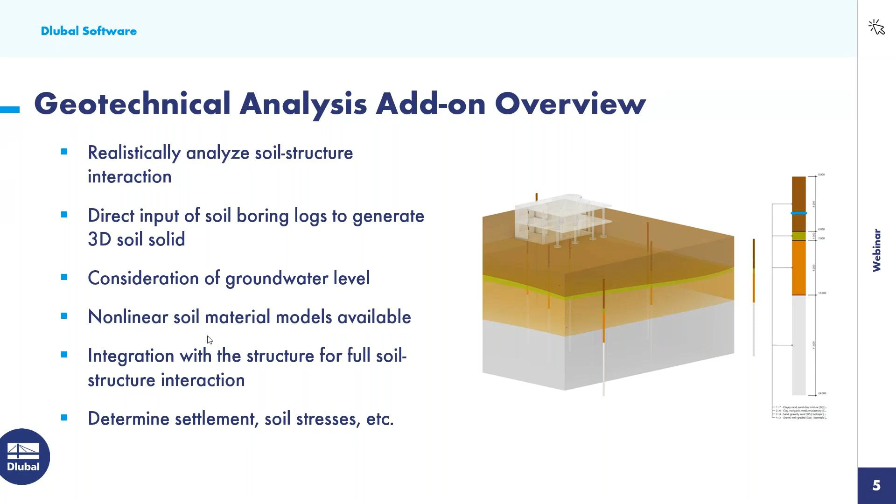So we might wonder why we'd want to use this geotechnical analysis add-on as opposed to a more simplified approach, where we have a slab type element and typically just apply a spring support stiffness to the base of the element. In comparison, the geotechnical analysis will generate this 3D soil solid instead, as we see here on the right-hand side.

The first benefit is realistic soil structure interaction. We want to capture the load distribution, lateral pressures, and shear interaction in all directions, beyond what the simplified vertical support can provide. We also account for nonlinear and layered soil behavior, including the soil's stress-dependent stiffness, plastic deformation, and layered soil profiles for better accuracy. We can also accurately predict settlement and deformation. With the soil solid, we can capture differential settlement, lateral spreading, and localized failure much more effectively than the simplified approach.

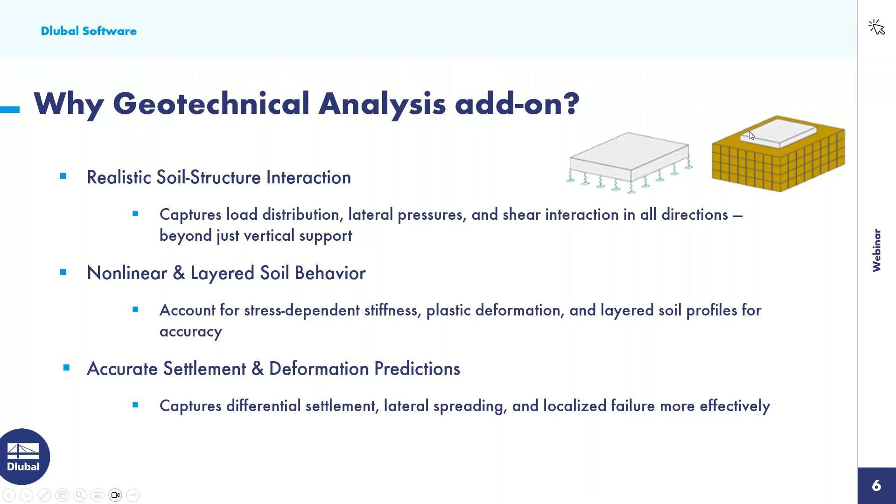So on this next slide, we do have a few modeling tips when we're talking about this 3D soil solid. The solid dimensions should be adequately defined when we compare this to the structure's dimensions. This is an image taken directly from our online help manual here in the upper right-hand corner, where our structure is going to have the dimensions A and B.

So these are the starting recommendations here for the size of our soil solid, but we highly encourage you to carry out what we call an edge distance results study. Ultimately, this may be the starting point, but perhaps we can decrease the size of this soil solid. That's going to generate a much quicker analysis, the smaller this solid is within an FEA program, but we want to see less than 10% changes in the stresses at the boundary surface. If we continue shrinking the size of this solid model and we're seeing higher changes in stress at these boundary surfaces, then we know our soil solid is not big enough. So we probably want to increase that size, again, to get accurate results here in comparison to the loads that we will apply to the structure as well as the size of the structure.

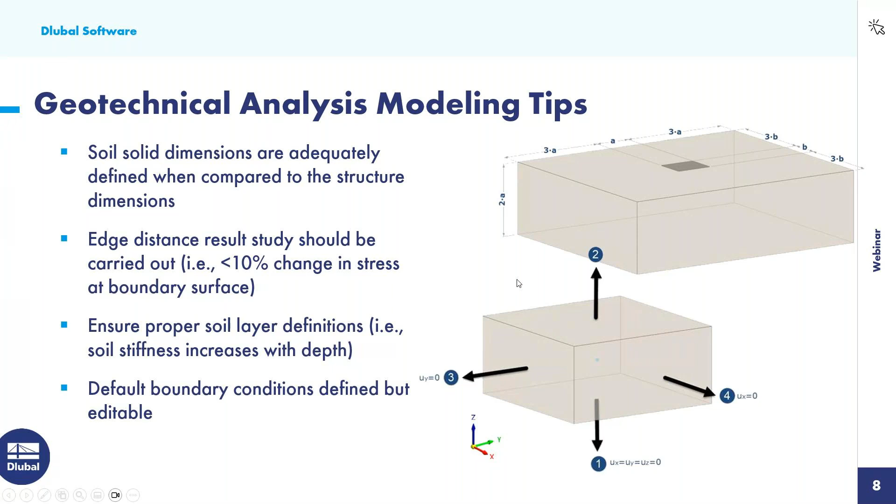For the last point here, the program will automatically create the default boundary conditions of our solid element, but these are always editable. As you can see here, another image from our online help manual, with the soil solid, in the lateral directions, we are going to restrain the translation. At the bottom of the solid, we're going to set a support so that translation in all three directions is fixed. And then of course, at the top here, number 2, the solid will be free to move.

Now looking at the nonlinear solid soil material models available within this add-on. Soil is a highly nonlinear 3-part system, and this includes soil particles, water, and air. So therefore, we need to utilize special material models that mathematically represent this very complex soil behavior in something like an FEA program. Currently, when looking at RFEM, we have 4 material models available, including the modified Mohr-Coulomb, the nonlinear elastic, and the modified hardening soil, as well as the Hoek-Brown.

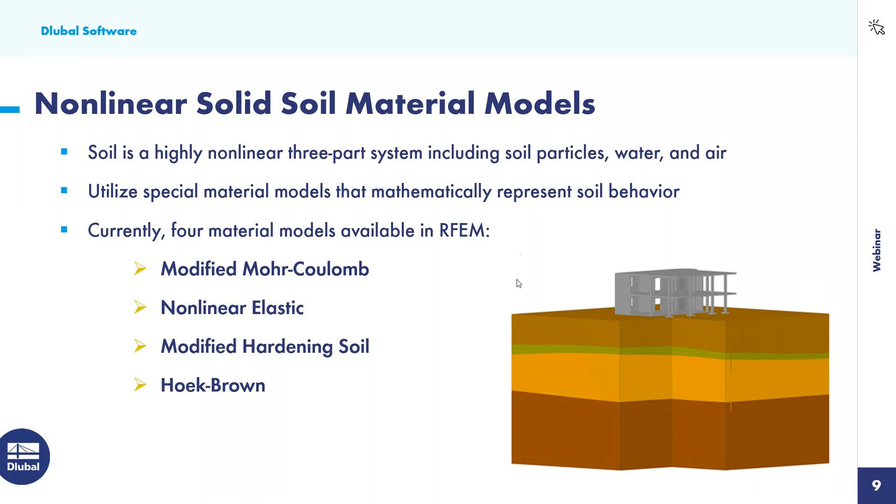So now we will investigate each one of these material models. I think it's important to have a fundamental understanding of what each one of them can provide and maybe the best scenario to use this in your model.

We'll begin here with the modified Mohr-Coulomb. This is going to combine linear elastic and ideal plastic behavior. So essentially, we have a reversible linear elastic behavior within a stress limit zone, but when that stress reaches the yield point, then that's when the irreversible plastic behavior is going to begin, and this is all according to the Mohr-Coulomb equations. The material will also fail when the shear stress exceeds the material's shear resistance. These 3 points can be summed up here with the stress strain diagram for this material model type. So this modified Mohr-Coulomb is really ideal for approximating the actual soil behavior, but with very few material property definitions.

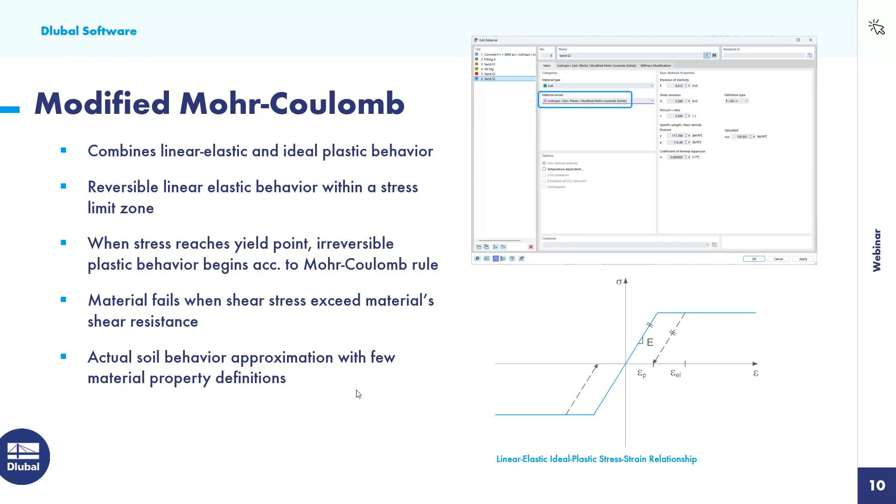So the input here, once we get into RFEM, is quite a bit simpler than when we compare to the other material models. Our second material type is nonlinear elastic, and this is actually what we'll use in our first example today. So this is a hyperbolic nonlinear elastic behavior for this type of soil.

The third material type is a modified hardening soil. This is an advanced elastoplastic soil model for nonlinear soil behavior. For this one, we have elastic behavior where soil stiffness varies with the stress level for both the oedometer and the triaxial stress strain responses, and again we have two separate stress strain diagrams depending on the different conditions applied.

When the stress reaches the yield point, the elastoplastic with double hardening behavior will begin. The soil material is also stress dependent with stiffness, in the sense that with higher stresses we're going to have increased stiffness. So when we look at much deeper soil levels, they're able to resist deformations much better than soils near the top surface. This can provide more realistic predictions compared to the simpler Mohr-Coulomb model, and is ideal for soft or over-consolidated soils.

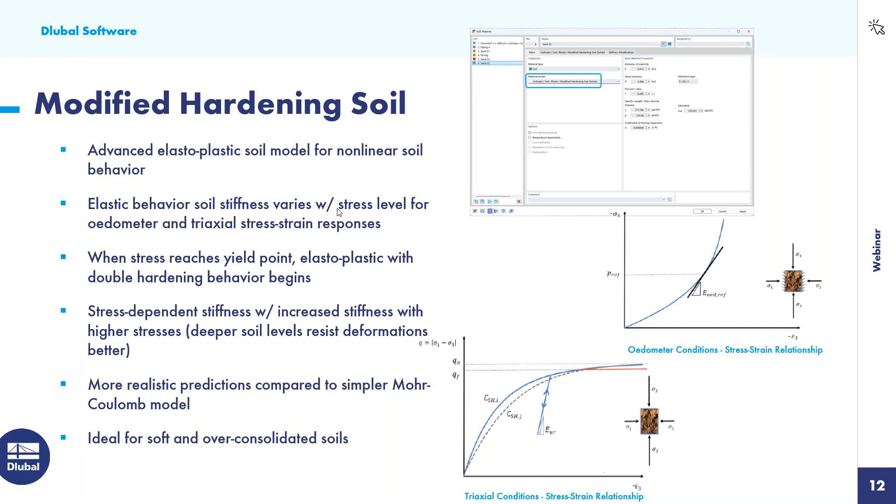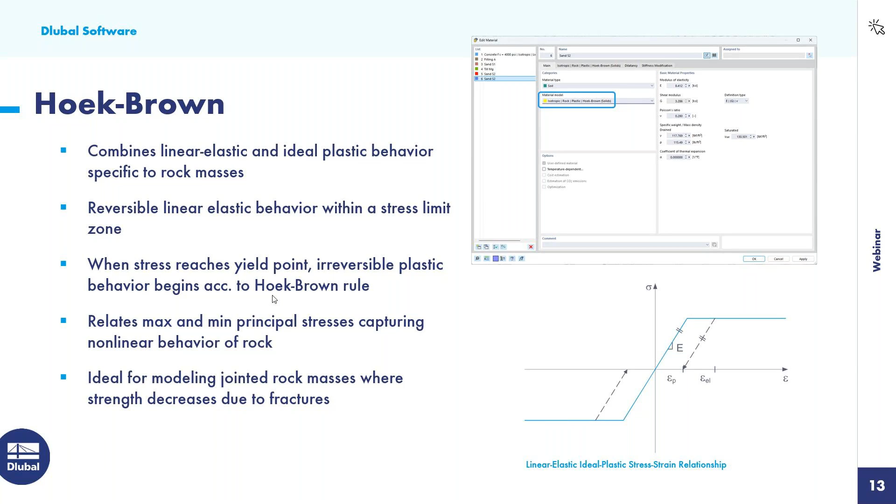Okay, so we are finally ready to get into our first example today. When we create a new model in RFEM, we are presented with our base data dialog box. For those of you not familiar with our program, RFEM 6, RFEM is the base program. This allows us to fully model a structure. We have access to all the materials, the cross sections from all the various standards, and we can load it and get a full static analysis.

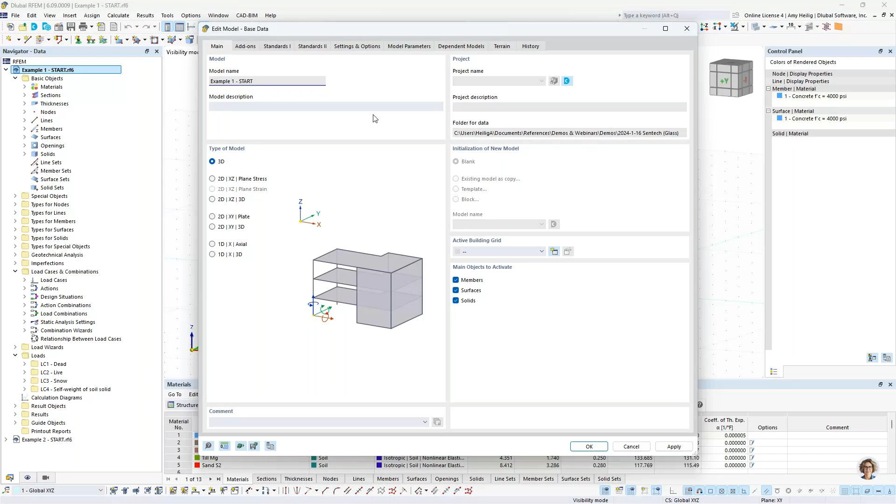Under this second tab are all of the additional add-ons that we have available. Today we'll be focusing on our geotechnical analysis add-on that's activated here, but it's entirely possible if we wanted to also design this structure utilizing the design add-ons such as concrete design, we could carry out the membrane surface reinforced concrete design according to the ACI or CSA standard.

So once we have defined this information, we are presented with the main program. I have already modeled this concrete structure, as you can see here, with surfaces and member elements, and the material is 4,000 PSI concrete. I also have applied a few loads directly to the structure.

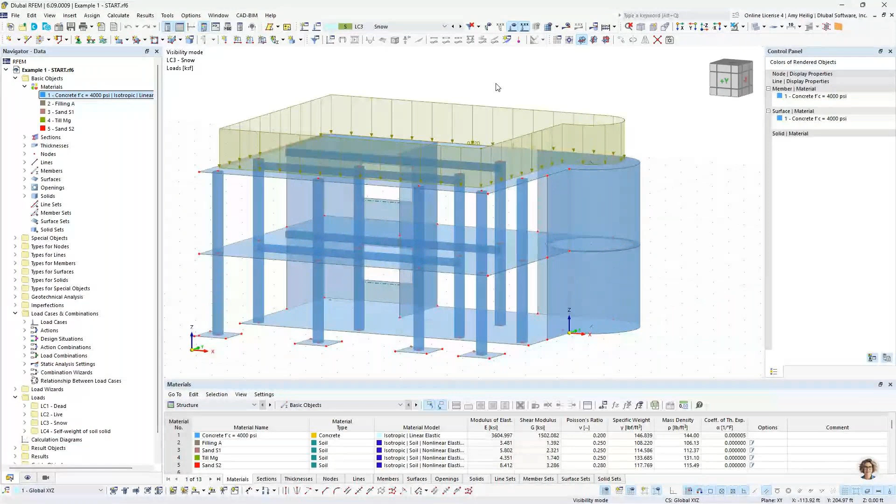Using our dropdown at the top to select the dead load case, we'll go ahead and turn on the display of the loads. We have here just a general surface load at all three levels. When we look at the live load, same concept with a slightly different magnitude, and then we have a snow load. So all vertical gravity loads for today's soil structure interaction.

Now in addition to the material defined for this structure, I went ahead and also defined the materials here for our soil. So let us take a look at that in more detail within the material dialog box.

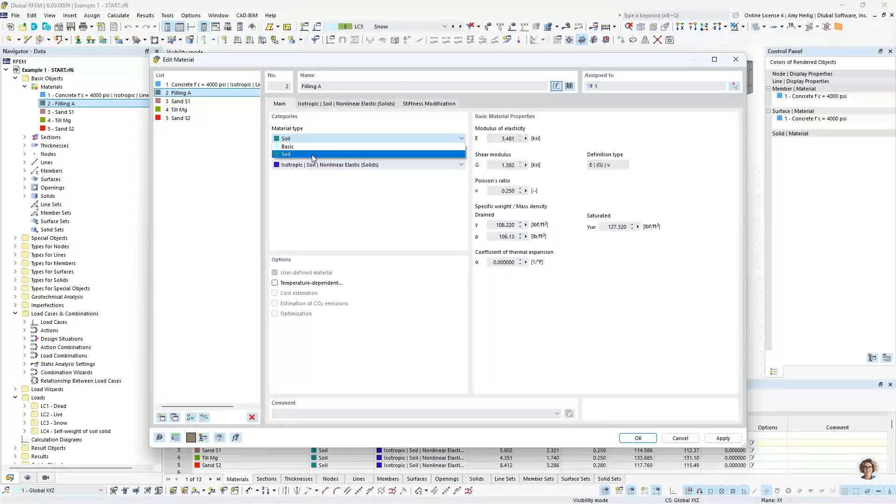Now the first thing to know is that when you create a new material, we want to set the material type to soil, and this is only available because I have activated that geotechnical analysis add-on. If we prefer, we could visit our library and use our filters on the left to select the soil option. We have a few soil input options that exist here that we could use as a template, and we'll continue adding more materials in the future as well. We could bring those into this dialog box and use it as a template option, or alternatively define all this information from scratch.

But once we've defined the material type to soil, you'll notice the material model, and here are those four different material models available that we went through within the PowerPoint slides. For today's example, I'm going to utilize the nonlinear elastic material, and I went ahead and put in the specific weight. Notice that you can specify here the drained specific weight versus saturated, because we can input into the program where the groundwater table is located.

Under the second tab is where we have additional information specific to our material. Perhaps we got this from the geotech engineer or from soil testing directly, but this is information we need to input into the program. So I have four different soil materials here, including a filling, a sand, a till, as well as another sand material. Again all nonlinear elastic, but the material properties are going to vary slightly.

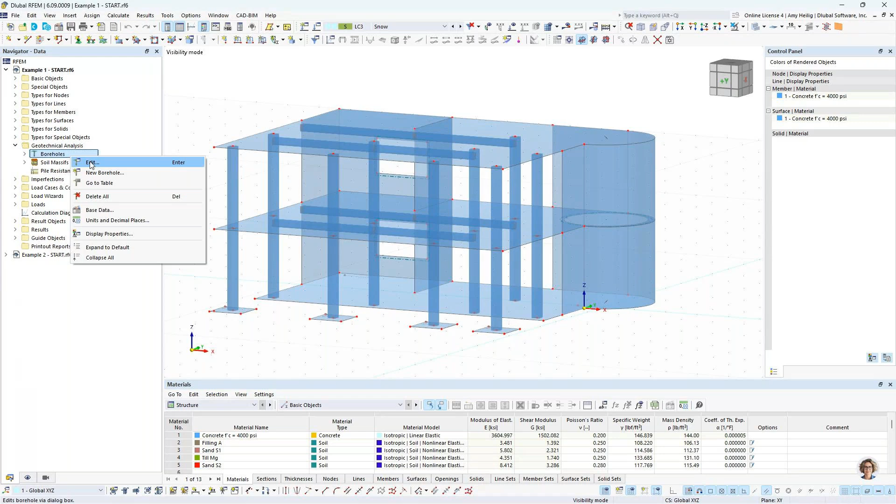So once we have input in all of our materials, we're ready to create our first borehole. I'll go ahead and collapse these folders over on the left here within our navigator. You'll notice that we have the geotechnical analysis folder, available because we've activated that add-on. We can right click here to create our first borehole definition.

Within this dialog box, we want to first specify where this borehole exists. We can either graphically select it with this pointer option, or we can input the XYZ coordinates as we see back here in the model directly by typing them in. So that's what I'll do today by typing in negative 91.67 in the X location, 70.67 in the Y, and in the Z direction this is going to be negative 0.5.

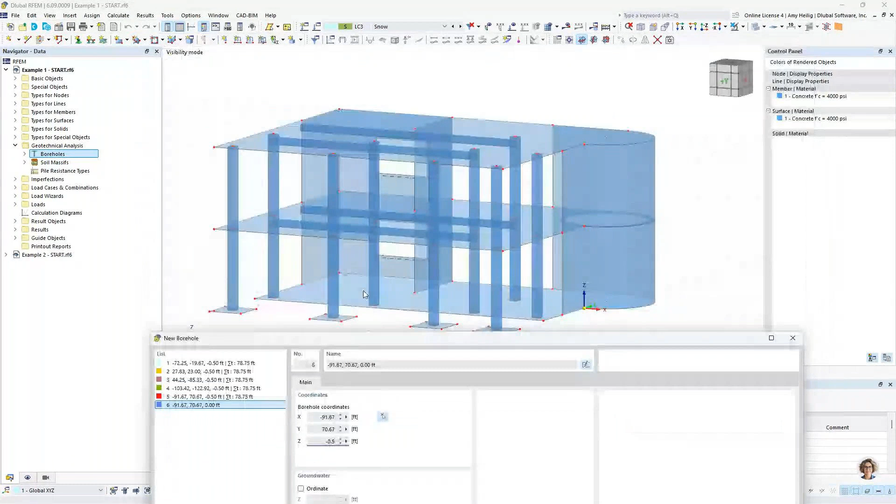Notice I am not placing this at the 0 elevation, which is where the foundation of my structure is located. I'm placing this 6 inches below the structure, and there's a reason for this that will come into play a little bit later on with what we call surface contacts, but just keep that in mind.

Now we also can specify the groundwater location with the elevation input here of negative 11.5 feet in the Z direction, or the vertical direction. And finally, we can populate down here our soil layers by using our drop down to simply select the materials that we have already defined within the model.

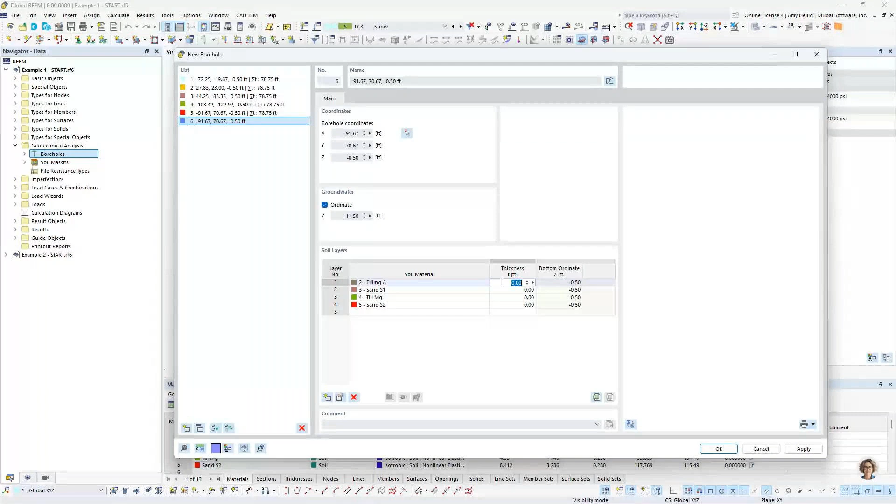So I'm selecting all 4 materials that I have input in. The second column is where I will input the depth that each material occurs within my soil testing. So the first depth is going to be 19.67 feet. I use my down arrow key. The next layer depth is going to be 3.25. Then we have 19.67, and the final depth is going to be 36.16.

So we get a nice overview here of the elevation of each of the different soil materials. We can even see where the groundwater level is located as well. Once we have input these different boring logs, and you'll notice I have already defined several other boreholes, I'll go ahead and turn these on graphically within the model. Under the second tab, under the geotechnical analysis, I currently have these turned off, so I'll go ahead and activate them. We have a total of 6 boreholes defined here in and around the structure.

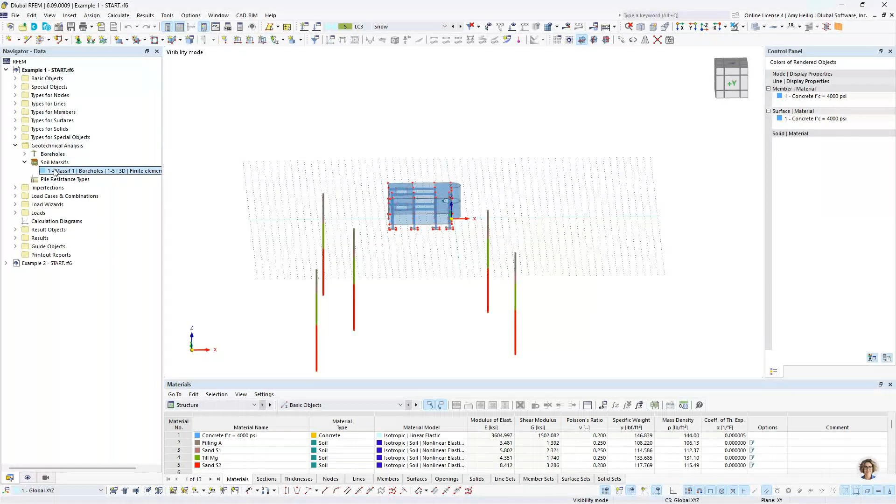So once these are now defined, we are ready to create what we call the soil massif. This will generate that 3D soil solid. We can take a look here—I went ahead and already created this 3D soil solid, but let us go through it. So we can create a new definition type here in the lower left.

And the first input is a soil massif type. We're going to set this to boreholes. I'll explain a little bit later on what the soil solids advantage is here, but for now with the boreholes, we can select this option and either graphically select boreholes number 1 through 5, or just type it in directly on our keyboard here.

The soil massif center should be placed as close to the center of the structure as possible. We can graphically select this here within the model, or we could directly type in the X and Y coordinate points. Then the soil massif dimensions.

We discussed this in the PowerPoint—these dimensions are really important. We want to make sure it's adequately large enough that we're not seeing the stresses affected at the boundary edges, but we don't want to set it too large so that it affects our calculation time with no added benefit.

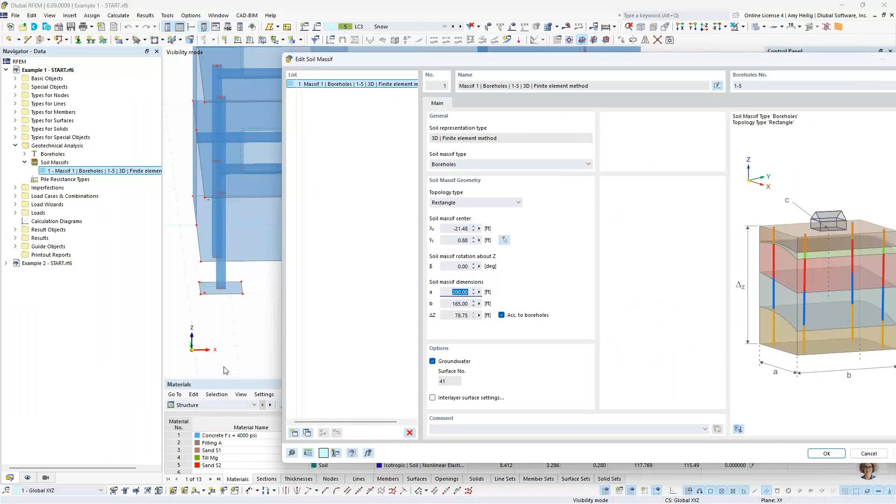So we have here the soil dimension in the A direction. We have a nice picture showing the A dimension, which aligns with the global x-axis—we can see the x-axis here back in our model. I have set this to 200 feet. My B dimension is going to be set at 165 feet, which aligns with the global y-axis.

We also can account for the groundwater within the soil solid by turning on this checkbox here. When that is finished, I will go ahead and display the 3D solid, since I currently have it hidden. If I turn this into a solid rendered view, we get a nice look at all of the different materials that were generated with the soil solid from the input of the boreholes. Now notice that some of these boreholes exist outside of the solid—no problem.

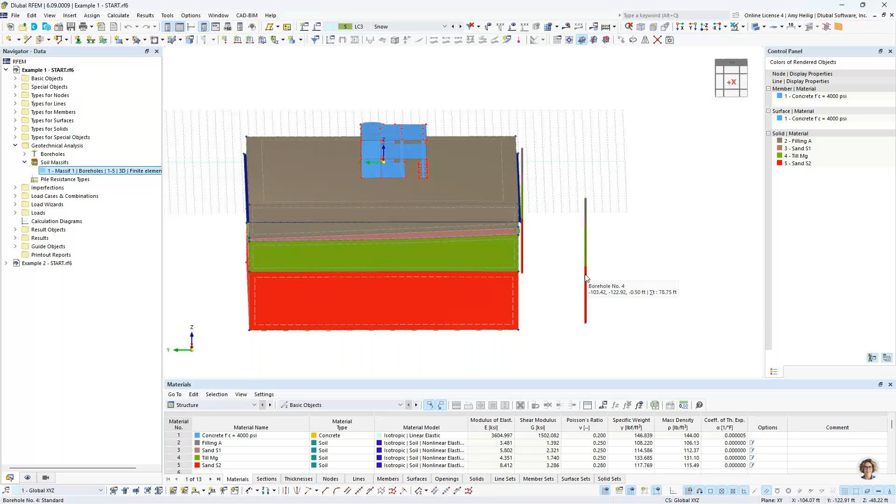We're still considering the geometry here of these different solids, but we don't necessarily need to extend it out to these different locations.

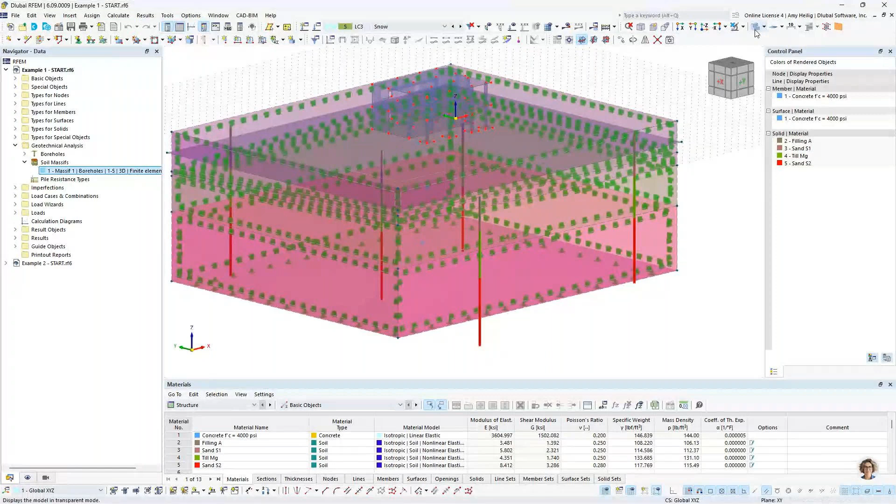Turning this back into a rendered view with transparency, you can see all of these green symbols. These are our support conditions, and I also mentioned in the PowerPoint that these support conditions are automatically generated for us. But we might be wondering, how can I make modifications to this soil solid? Because right now everything is dependent on these boreholes.

Well, if we look at the basic objects here, we have the solids option, and the program has automatically generated 4 different solids for each material type. So you can see here solid 2, solid 3, and solid 4. Again, the geometry is dependent on the boreholes.

What we have the ability to do is go back to the soil massif here and say, okay, now that our solid elements are generated, I no longer want this to be dependent on the boreholes. Rather, I can toggle this to the soil solids. And now I have the ability, because it's referencing solids 1 through 4 here, to go back into the model to make the modifications manually.

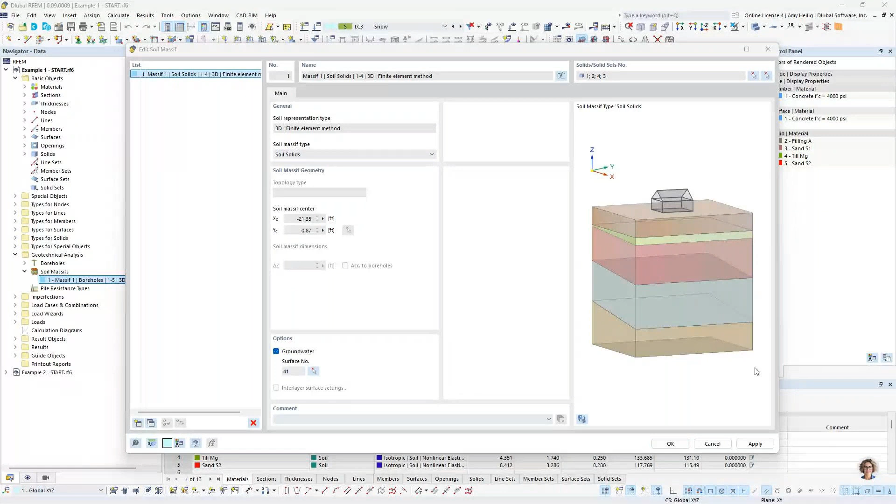We won't go ahead and do this. We'll leave this as dependent on the boreholes for now, but I think that's an important point to cover if we do want to make those manual changes.

Now we need to discuss the behavior of the foundation elements, such as these slab elements, to the 3D soil solid. We do so with a nonlinear option in the program. I'll go ahead and expand this here. Under these special objects, we have what we call a surface contact.

So we'll right click to create a new surface contact. This feature within the program allows us to define this geometric nonlinear behavior between 2 surfaces or groups of surfaces. So the first surface that we want to select here is going to be the top surface of my 3D solid that represents my soil.

So surface number 1. The second surface, I want to define the behavior here with this slab on grade as a portion of my structure. The third input option here is a surface contact type.

With this option, we have the ability to define the behavior of the contact perpendicular to the surfaces. We've set this in the dropdown to fail under tension. So if we have tension between these 2 surfaces, we're not going to see any force transmission, but in compression, we'll see the 2 bearing on one another.

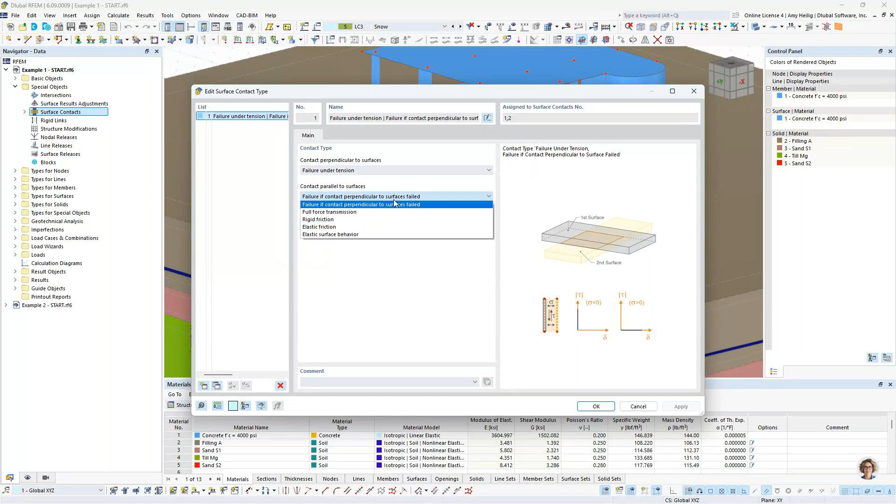Now, contact parallel to surfaces, so we're talking about the shear behavior. We have set this to fail if the contact perpendicular to the surfaces fails. There are some different options you can select from here, but for today, this is adequate. So once we have input in this option, we click OK. That surface contact is defined.

I also defined here a second surface contact. This is going to be for the grouped surfaces here for my isolated footings at the base of my column. You can see surfaces 18 through 21. And my surface number 1 here is again going to be that top surface of the soil solid with that same nonlinear behavior defined.

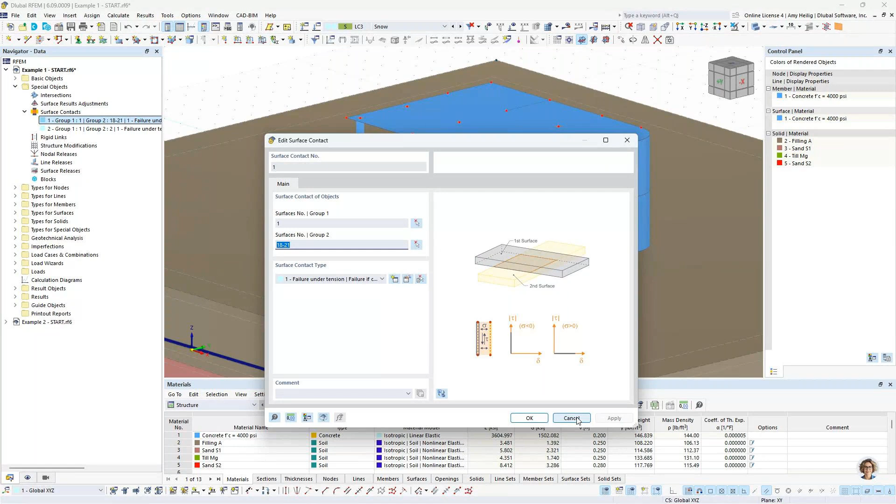So the reason why I set the soil solid 6 inches below the foundation elements is because surface contacts cannot be in the same elevation. The program will give you an error. So I set the soil solid 6 inches below the foundation in the vertical direction because my foundation elements are 12 inches thick. So I considered half the thickness of these elements to again set that soil solid 6 inches below this elevation.

The final thing to check here is the FE mesh settings before we move on to the loading. So under calculate mesh settings, and we talked a little bit about this in the PowerPoint, the target length for the finite element. This 1.5 feet is going to refer to the structure element itself.

Maybe we want to increase this to something like 2 feet, just for a slightly quicker calculation. It's worth noting too that you can always apply mesh refinements at specific surfaces or locations if you'd like. But notice that we have a 4th tab here for solids. This solid element for soil has a completely different input for the FE mesh that typically is going to be much larger. Again, we want to take into consideration maybe something like an FE mesh study, so that we set the FE mesh large enough that we're not really slowing down the calculation.

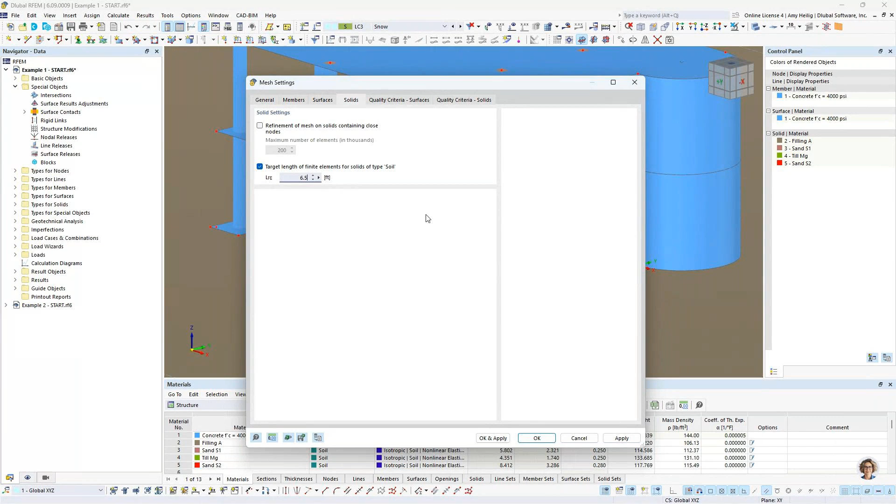But if we set it to something too large, we're going to get inaccurate results. So we want to find this happy medium. Maybe for this example, I'm going to reduce the soil solid FE mesh to something like 6.5 feet.

Now moving on to the loading, we'll open our load cases and combinations dialog box. We already saw that we have applied the dead load, live load, and snow load to the structure. Now you'll notice the program has automatically created this 4th load case for the self-weight of the soil solid. This was automatically generated with the geotech analysis add-on activated.

If we go back to this dead load up here, we are also considering self-weight, but this is for the structure, not the soil. So it's really important now that we address these static analysis settings when we are integrating this soil structure interaction. Let's take a look at these settings here.

By default, the program has the load cases set to a geometrically linear analysis. Perhaps we want to increase the load increments to 4 for a slightly more accurate calculation with these nonlinear materials. This is perfectly fine for load cases 1 through 3, but we actually need to make a copy of this static analysis setting.

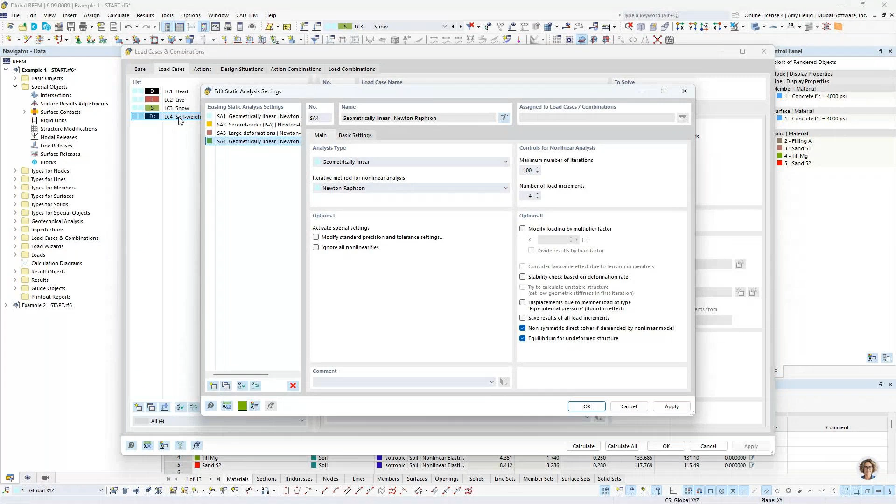We'll leave it at geometrically linear, the load increments to 4, but now we need to turn on this equilibrium for undeformed structure. This analysis setting is going to be specific for the self-weight of the soil, load case number 4 here. So what exactly is this checkbox doing?

Let us go back to the PowerPoint where I can explain this further. So this all refers to the initial state considerations of our soil.

We want to account for the soil self-weight before the construction begins. We're talking about before we add in the structure self-weight, before we add in the dead, live, and snow to the structure itself. So we want to calculate the soil self-weight in this initial load case.

But here is the complex topic related to this: that this starting point, referring here to the stress strain diagram, this starting point is going to be this blue dot here. This is where we are now going to apply the additional loads to the structure, such as the dead, live, and snow.

Well, we want to account for the soil's initial stress state and stiffness. So that's what we're doing here within this blue area, again, before we apply those additional loads.

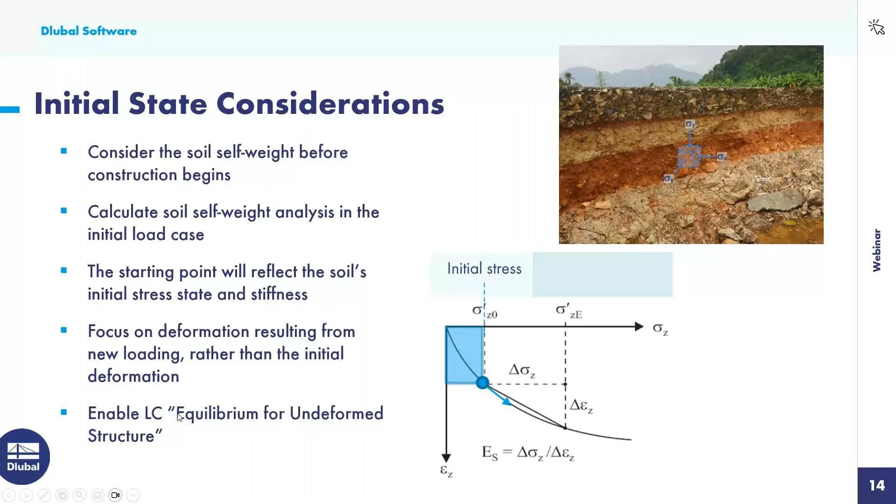But we want to focus on the deformation resulting from the new loading—again, the structure's dead, live, and snow loads—rather than the initial deformation from the soil self-weight. We want that deformation to start at 0, while still considering the initial state of the soil for stress and stiffness. That's why we enable this load cases equilibrium for undeformed structure within that analysis type.

So we'll go back to the program to ensure that this option is turned on here. We click OK, and then in our dropdown, we need to make sure that load case number 4 has this new static analysis setting activated.

Now, it really doesn't make a whole lot of sense to solve these other load cases without considering the self-weight of the soil, so we can just go ahead and turn those off. But rather, we want to combine all these loads within the load combinations themselves.

So we jump here to what we call the Design Situations tab. Design situations are automatically created by the program according to the ASCE 7 or the NBC standard. All this is doing is creating this first design situation for our factored load combination, grouping those load combinations together.

The second design situation created here is our ASD load combination, again just grouping together those unfactored load combinations from the ASCE. Now, for today, I'm not so interested in factored load combinations. We'll go ahead and turn those off, but we will take a look at the unfactored load combinations.

Now, before we jump to this load combinations tab, we want to make some modifications within the combination wizard itself. We go into this definition here, and by default, everything's set according to a second order analysis. I'm going to instead utilize this second default option, or I can make changes to the first input by utilizing that geometrically linear analysis.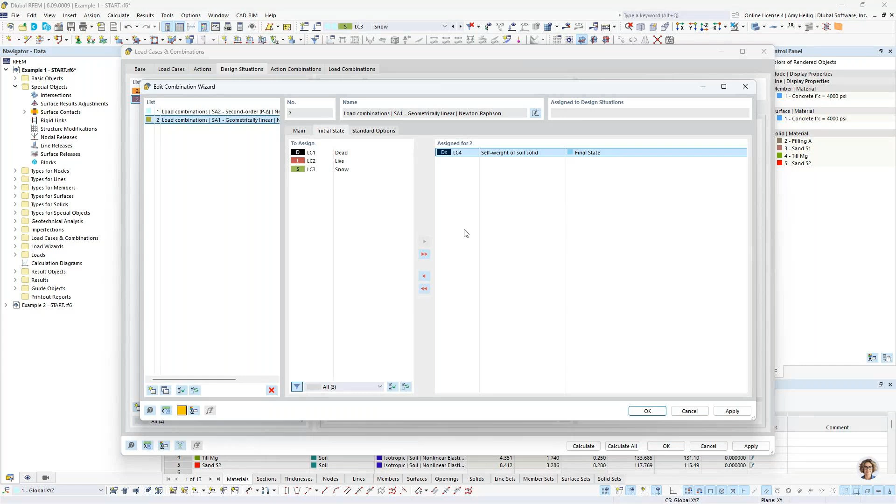Once this is defined, we need to make sure in our dropdown we select it, and then we can jump to the load combinations tab. Here are our factored load combinations listed, and you'll notice each one already has the initial state activated because we made that change directly within the design situation. Now, because this calculation may take a little longer due to the solid, I'd suggest we focus on just a few controlling load combinations rather than solving for all of them.

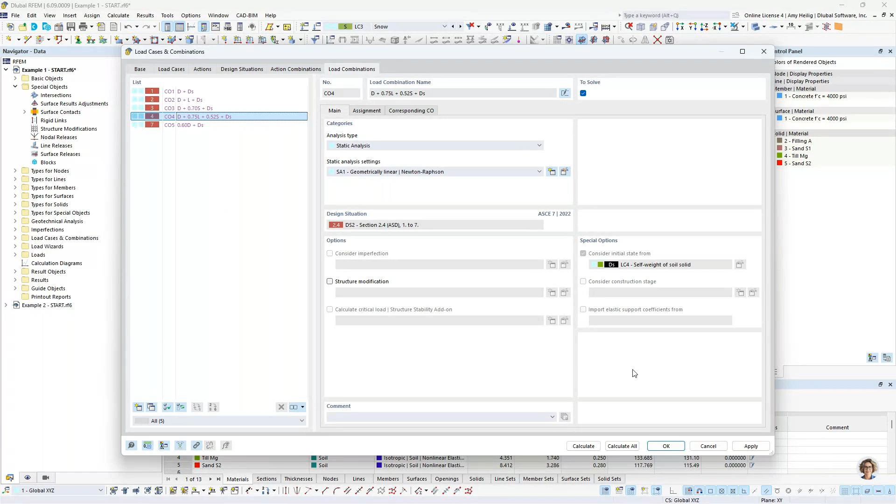So for today, I'm going to focus on load combination number 4. Once we have defined all this information, we would run our calculation. Because this does take a few minutes, I am going to open up an already saved model. So here we are, exact same model.

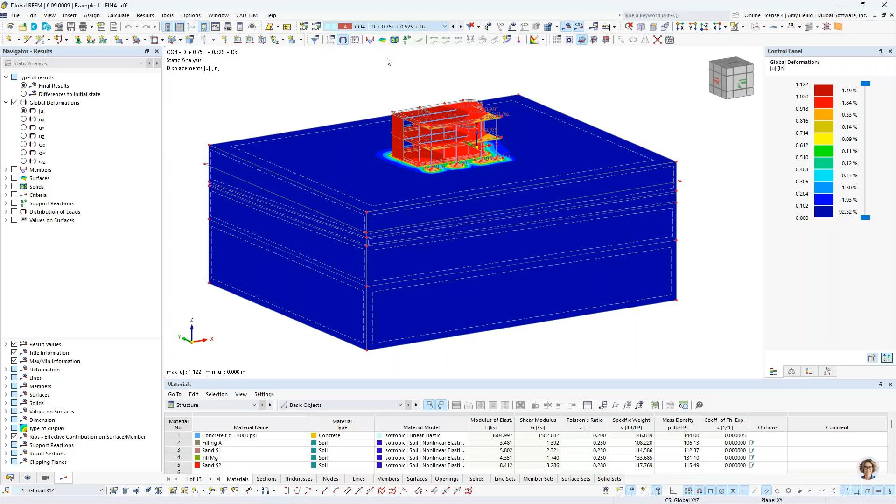We have just run the calculation for load combination number 4, as well as load case number 4. We definitely had to solve for that as the initial state before we could solve for load combination number 4. In our results, presented in the navigator under our 4th tab, we can immediately activate the stresses within the soil solid.

We'll focus here specifically on sigma z. This is the normal stress in the vertical direction for our different soil layers within that 3D solid. But you'll notice that when I toggle back to the global deformation, this is 0 — that's entirely what we covered in the PowerPoint. Our starting deformation is going to be 0, but we are going to account for the stresses within the soil from this self-weight load case.

Now moving on to the more interesting load combination number 4, where we have actually applied these loads to the structure. We can even turn them on graphically here to see the gravity loads applied, in addition to considering the soil solid.

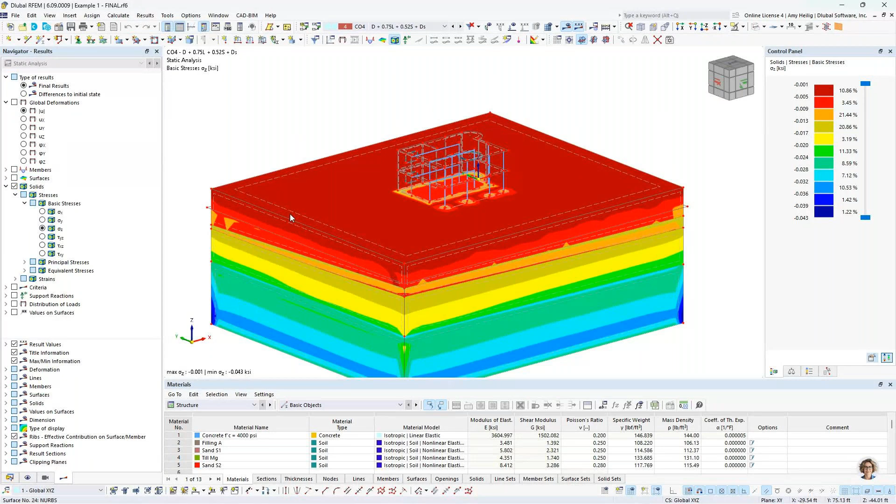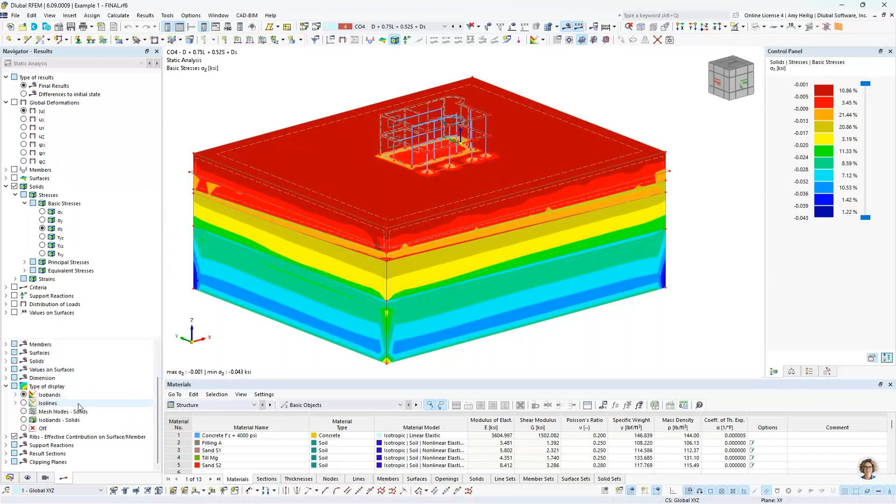Beginning first here with the stresses within the solid, we have activated sigma z again, and applied these additional loads. We have a lot of useful features within the program that allow us to view these results in different ways. One I'd suggest is under the type of display, we can toggle this to what we call the ISO bands for solids.

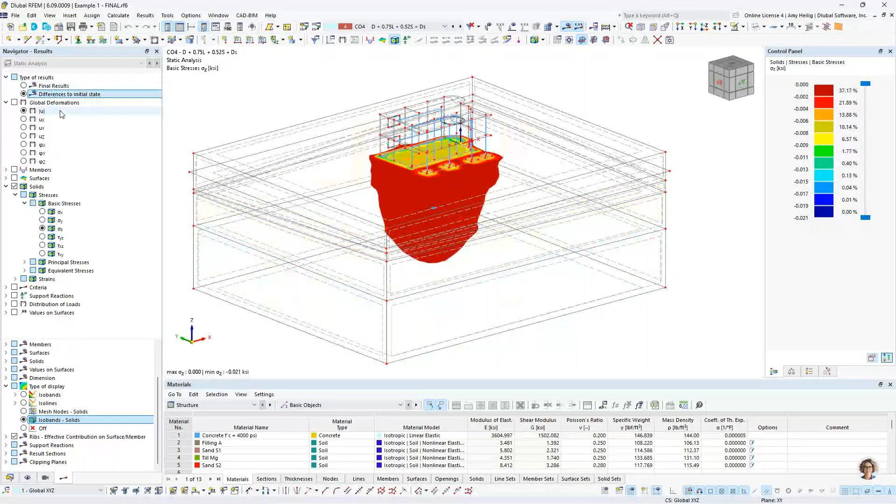Because we've set load case number 4 as an initial state for this load combination, we have an additional option at the top to toggle between the final result or view the differences to the initial state. So now we're not considering the self-weight of the soil; rather, we're only interested in what the stress in the soil is after we've added the dead plus live plus snow to this structure.

So this is a useful 3D view of exactly what's going on within the depths of that soil solid. We can toggle this back to the ISO bands, still viewing the stresses on the solid. If we go to a plan view, we can see, referencing our control panel, exactly what those stresses are in that vertical direction.

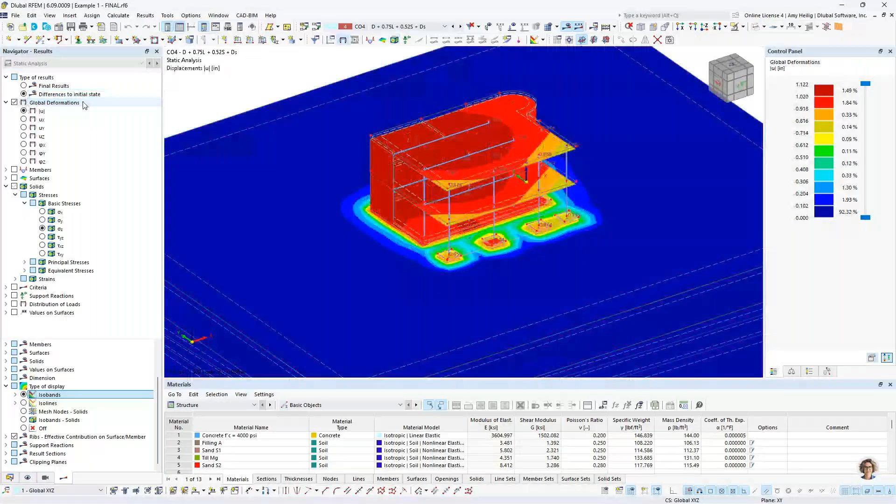Finally, we want to take a look at the deformations. Looking at the global deformations, we're also seeing the deformations of the structure due to the applied loads, but I'm really interested first in viewing the deformations in the soil solid.

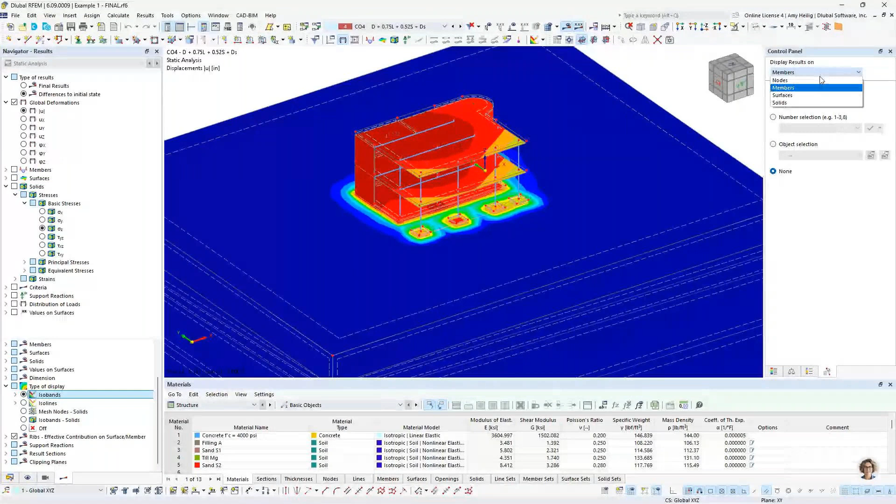We have the ability in this control panel to turn off the display of all members. I'm also going to toggle here to turn off the display of all surfaces, and now we're only viewing the deformation within the soil solid itself. We can even increase the deformation factor here, go back to a plan view, zoom in, and compare this to the global deformations given here in inches.

What else will be extremely user-friendly when we're talking about these 3D solids is the use of what we call clipping planes. So we can go back to this first tab within the navigator, and at the bottom we have what's called guide objects, and within here we have the clipping planes.

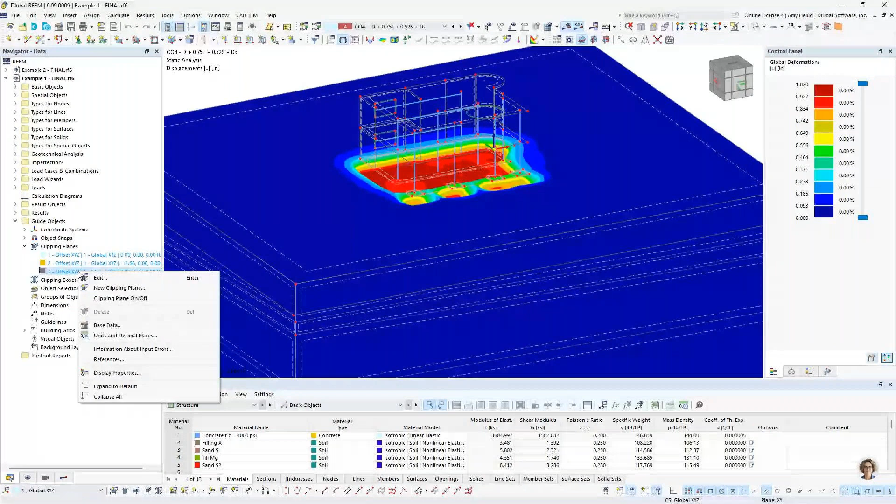Now we have 3 clipping planes created by default, but you can always add in your own clipping planes or modify these. We can right click to immediately turn on that clipping plane, which will slice right through that solid, so now we can see the deformations as a function of depth through the 3D element in RFEM.

We can also take this clipping plane and slide it back and forth here. Another nice trick is that if we hold down the control key and slide our clipping plane, it will actually move in 1-foot increments as well.

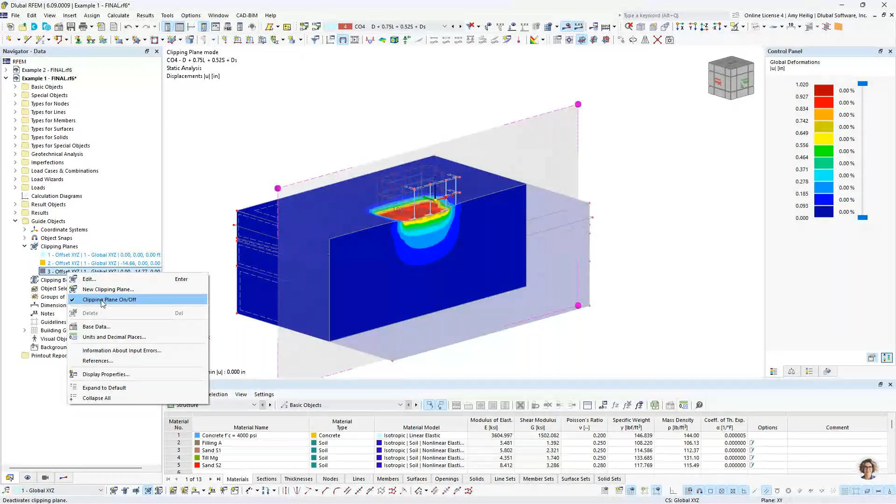So that's really addressing all of the result information for the 3D solid. But if we turn back off this clipping plane and go back to our results here, I'll turn back on the results for my surfaces and for my members as well. Remember, we're also interested in the additional stresses or internal forces from the settlement of the soil structure interaction within the concrete structure itself.

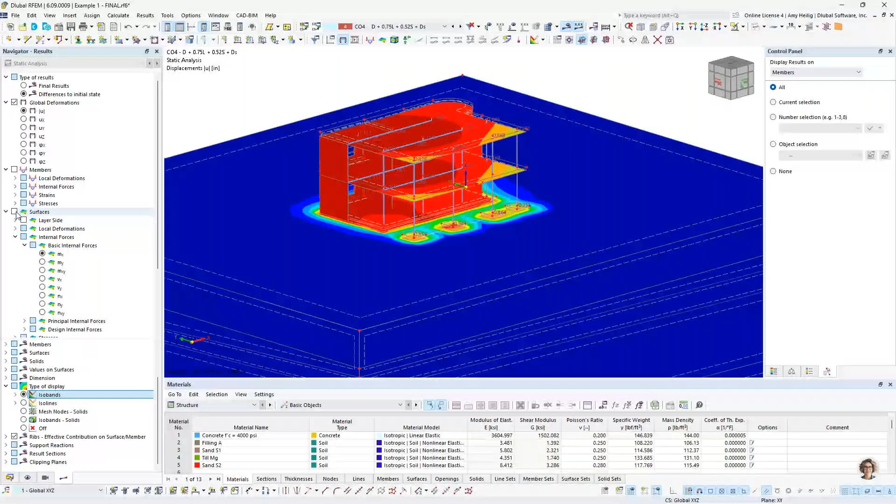So what we can do here is activate either the member internal forces or the surface internal forces. For example, taking a look at the MX forces in our concrete surfaces, or MY, we can also toggle between the final result, and I'll turn this back so we can see the values of our bending forces within the surfaces, or the difference to initial states. We should see slightly higher internal forces or internal stresses with our structure's results due to the settlement of this soil solid as well.

And again, we can utilize those additional add-ons like concrete design to carry out the full structure design all within one file here, according to the ACI or CSA standard.

All right, we're now ready to move on to our second example. For this, I'm going to go back to the PowerPoint here to talk about pile design.

This is something that's also available with the geotechnical analysis add-on, and there are a few requirements here if we want to carry this out. The first is that we will release a new member type in RFEM called pile, and we'll certainly see this with our simple example today. Also, it should be known that we need to activate the construction stages analysis add-on for the calculation.

The reason why is that soil is a very stress-dependent material property, very dependent on the load history. We have these highly advanced nonlinear soil material models that can account for this behavior, but we require the CSA add-on to calculate the deformations and stresses with higher accuracy when looking at something like the pile design.

We also have only a couple material models we can use here, in that selected list of 4 that we have available. This would either need to be the modified Mohr-Coulomb, which we'll use in our example today, or the modified hardening soil. The other 2 material types cannot be used with pile design.

We also will integrate the pile, its line so to speak, directly into these soil solids with an independent mesh. The reason we do this is because the solid is the primary component and the pile is secondary, so we want this pile to kind of follow along with the behavior of the soil. This will make more sense in our example today.

Okay, so we will jump to our model here, and I already have generated in this model the 3D soil solid. The reason why is because we've already covered the basics in example number 1, so we don't need to go through these in detail again, but I'll give a quick overview here, and maybe we turn this to a solid rendered view.

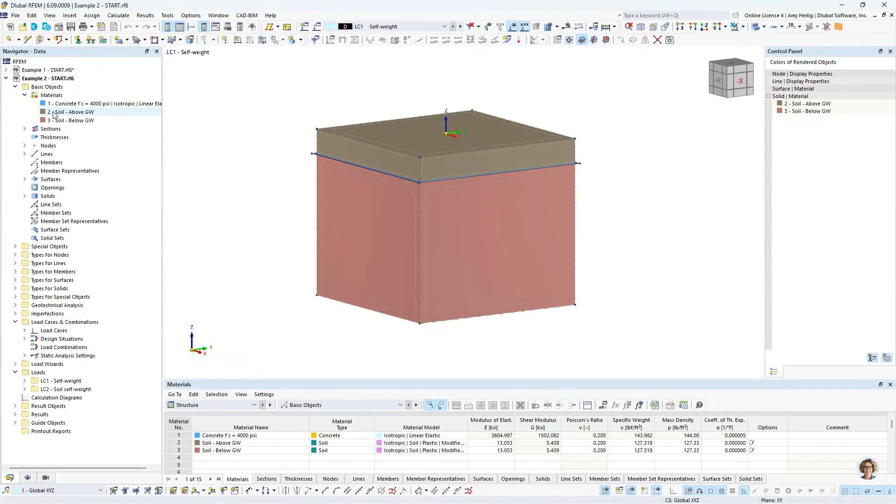So for my materials, again, very simple example today. I've applied here 2 soil materials, maybe one for above the groundwater. This is going to be the modified Mohr-Coulomb material type—again, it can also be the modified hardening soil, but with pile elements, we cannot use these bottom 2.

I've input the relevant material properties under the second tab. You remember from the PowerPoint I talked about Mohr-Coulomb being a little simpler than other input options with the material models. You can see why here. I also have a second material just for below groundwater, with modified soil property input.

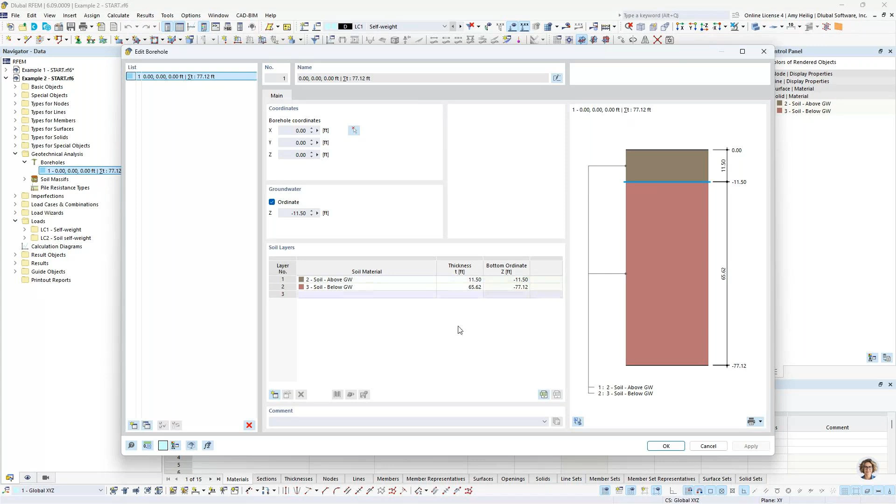Once we've defined this, as we saw from example number 1, we jump to the borehole definitions. I have one very simple borehole for today defined directly at the origin. I defined my groundwater elevation at negative 11.5, and I have those two soil materials populated in my table with the relevant depth. Nothing new here. If I turn this to a rendered view, we can see that borehole right at the origin.

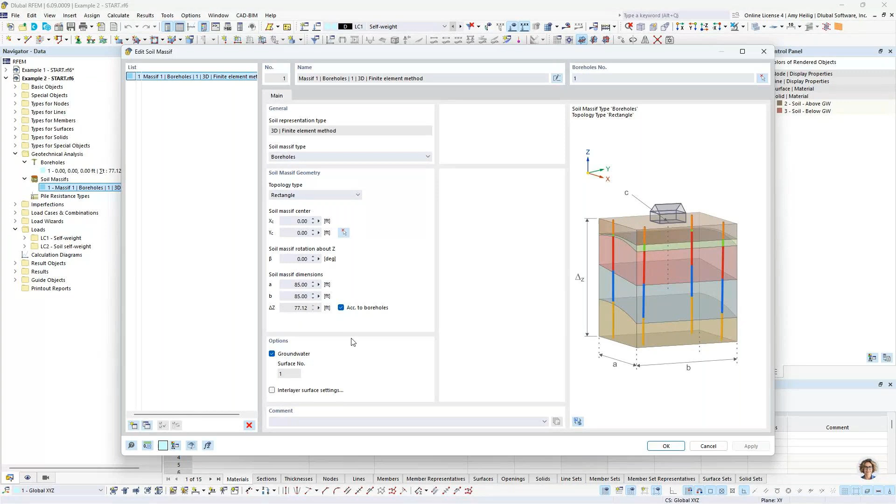Once we have the borehole defined, we jump to the soil massif, referencing borehole number 1. I place the soil solid material right at the origin point. This is a very simple example for today, a single pile element, so my dimensions here are set much smaller, 85 feet by 85 feet in both directions. I'm also accounting for the groundwater, so we see that soil solid generated here.

The next step is to draw our pile element. First I'll turn off the display of my boreholes graphically, and we create a new member element. I'm using my quick tools up here to create a new single member perpendicular to the work plane. When I select this, we need to set the member type. As I mentioned in the PowerPoint, when we activate the geotechnical analysis add-on, we have a new member type called pile.

Under the second tab, this is where we specify the cross-section and material. I have already defined a 50-inch diameter, 4,000 PSI cross-section that I'll apply to the pile, but keep in mind it doesn't necessarily have to be concrete—it could be a steel pile or any other shape you see relevant.

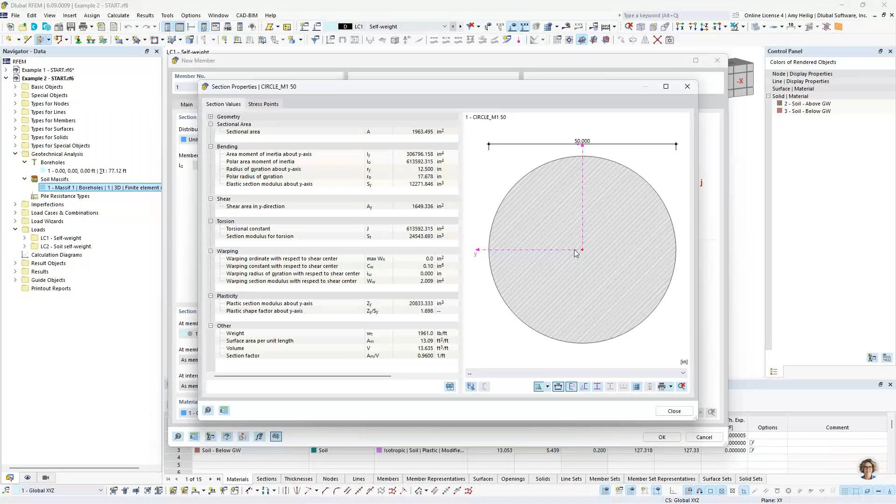Once we've assigned this cross-section and material to the member, we now have a third tab for pile, where we input the pile resistance type. We create a new definition here. This input refers to the resistance parameter—at the top for this pile element we input the skin friction or resistance along the pile shaft, and down at the bottom we input the end bearing capacity, or the resistance at the pile tip.

This information is always dependent on the soils we have and on the geometry of the pile. My colleague gave a great webinar previously that you can refer to, where she goes much more into detail on how to calculate this. For today's example, we'll assume we've calculated all of this outside the program and can input it directly. The shear strength at the start and end will be set to 1.25 kips per square foot.

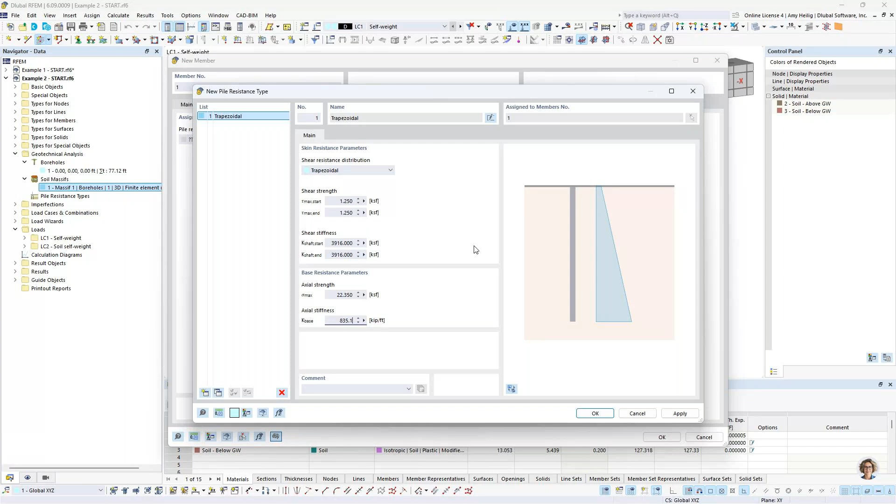Moving on to the shear stiffness, I'll set it to 3916 KSF at both the start and the end. Finally, we have the base resistance axial strength, which we'll set as 22.35 KSF, and the axial stiffness set at 835.1 kips per foot. Now that this information is set, we click OK, and we're ready to draw this element graphically within the model.

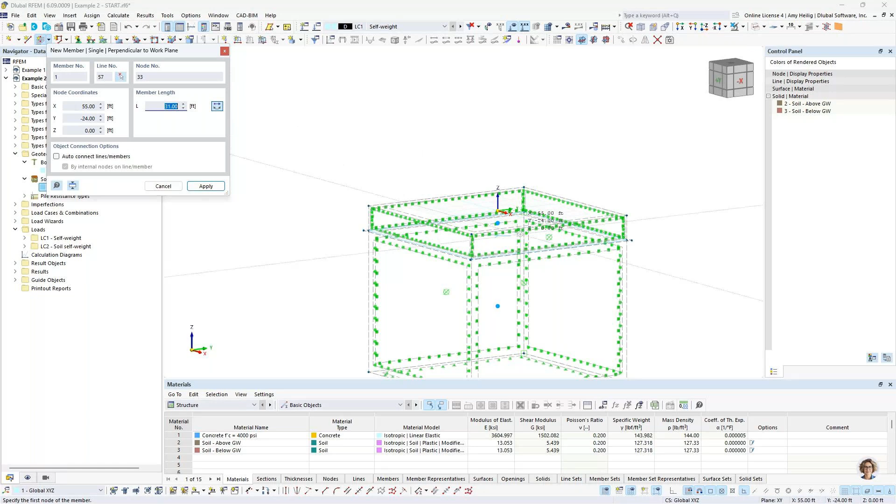I'll turn this to a wireframe view and set the member length here to 31 feet. Notice if I try to snap here, the pile is in the wrong orientation—we can quickly use this button to reverse that. Then I input it by selecting directly at the origin point for my pile element. I'll go ahead and turn off a couple other things here.

You'll notice that this pile, if we turn this to a rendered view, is essentially drawn directly within this soil solid. I also covered in the PowerPoint the importance of integrating this pile in the solid, so we have to do this within the solid element itself. We go back to the basic objects, and because we've created that soil massif, the program generated two solids for us based on our materials. Within these two solids, we can simply double-click to edit it.

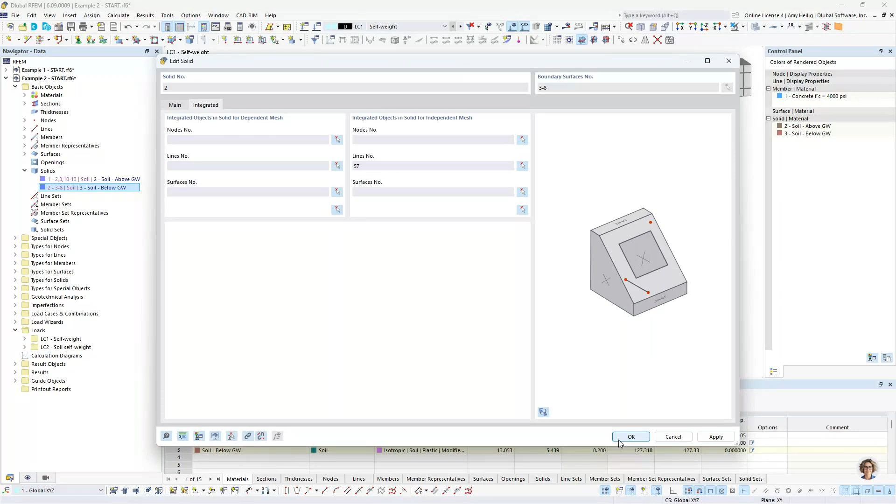We need to add in this option, integrated objects, and we get a new tab here where I can tell the program to integrate this line as an independent mesh for my pile. I can graphically select this line element in the model, line number 57, and click OK. I'm going to do the exact same thing for the second soil solid, integrating it here, this time directly typing in line number 57, and click OK.

One more thing to do before we move on to construction stages is to apply some type of load to the pile element. Going into our load cases and combinations, we have both self-weight load cases automatically generated by the program: the self-weight of our pile element, and the soil self-weight, just like what we saw in example number 1.

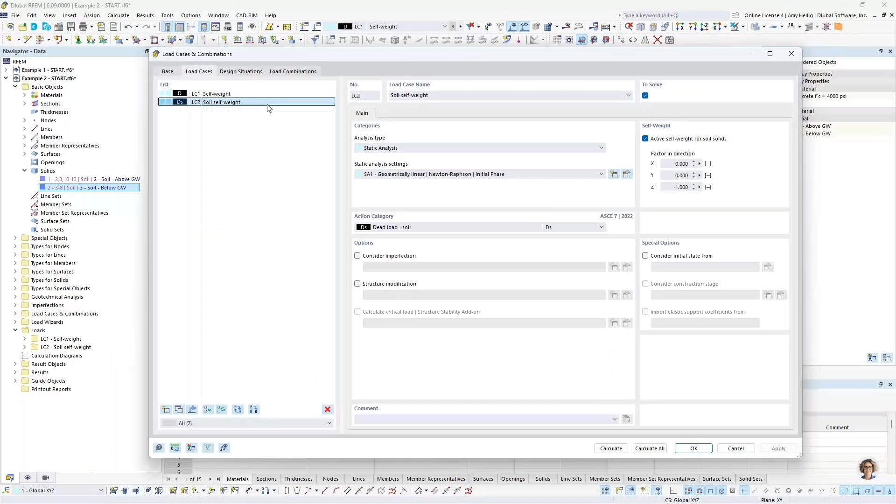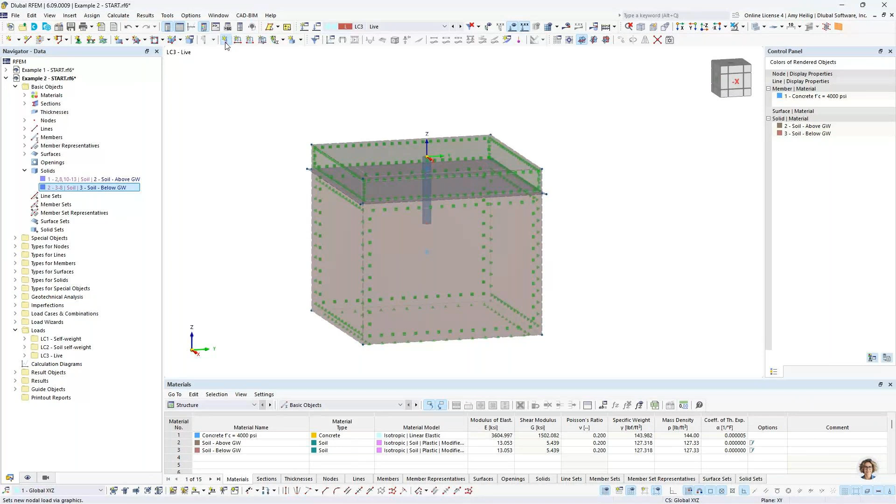I'm going to create a third load case called live load, and modify the action category according to ASCE 7 within this dropdown to live load. I click OK, go back to the model, and apply a simple nodal load. Under load case number 3 for live load, I apply a downward force of negative 375 kips. I graphically select this point at the origin, and once we click OK, we see this load applied at the top of our pile.

As I mentioned before, we need to activate the construction stages analysis add-on, and we do so by going back to our base data dialog box. The construction stages analysis can be activated here. Once we click OK, we're brought back into the program, and I'll collapse most of these folders. We now have a new option to define the construction stages.

The CSA add-on is exactly as it sounds. We can create different construction stages, maybe activating different elements in each stage, maybe varying the loading in each stage, and that's going to be required for this pile analysis.

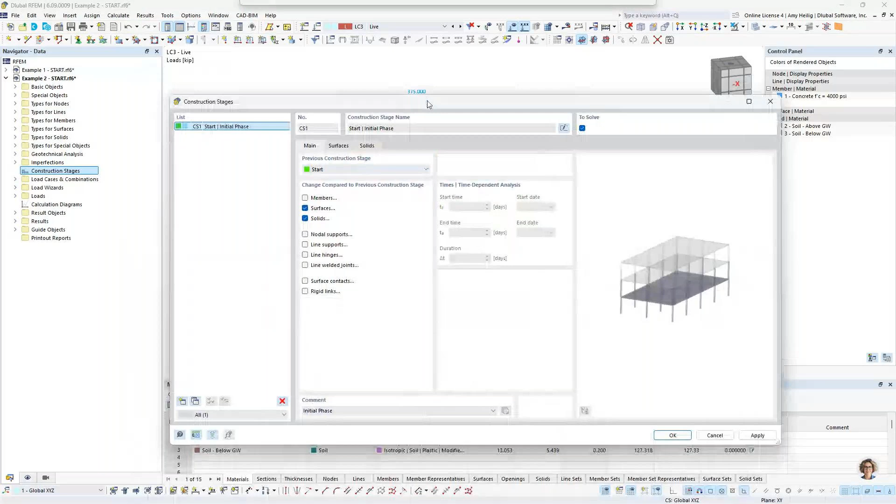The first construction stage I'll give a comment that this will be the initial phase. With this initial phase, we want to activate all surfaces and solids within the model. This is really just specific to our soil, so we activate solids 1 and 2, but also the surfaces because these surfaces have boundary conditions, restraints that we need to consider. That's all that's required within this initial phase. What we'll do in a minute in the static analysis settings is convert this to a linear elastic material, but that will make more sense once we get to it.

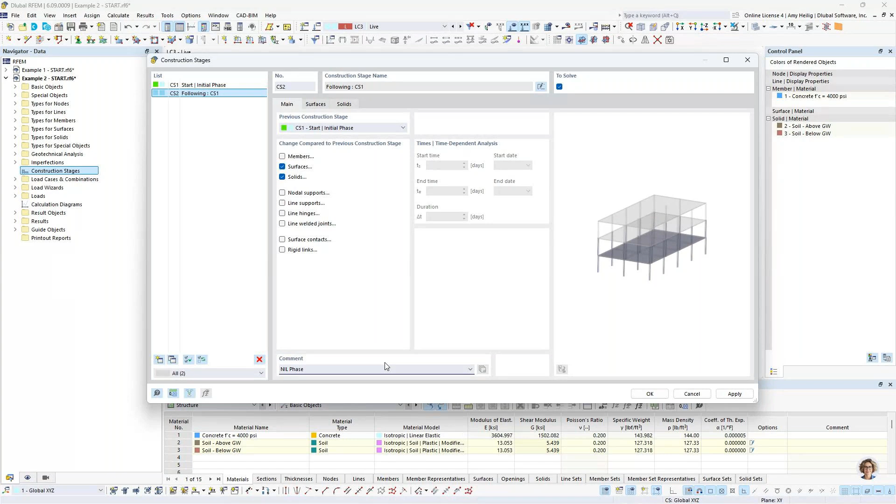We create our second construction stage, which will be the Nil phase for our soil. We have no modifications here, no changes compared to the previous construction stage. We're still just looking at the soil solid, but once we get to our static analysis settings, we will convert this to a very highly nonlinear material model.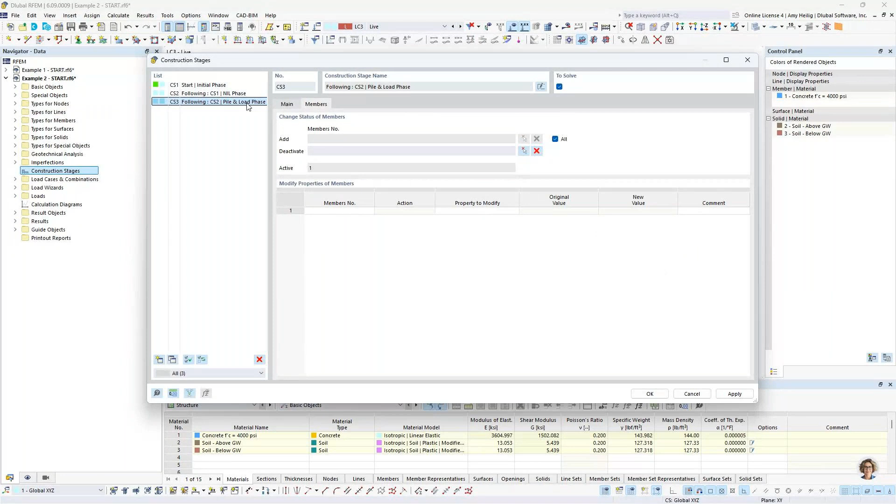The third and final construction stage, which we'll create now, is where we want to activate both the pile and load phase. As far as the construction stages, we activate at the member level and click all members—it's only member number 1. As far as the loading, we'll activate that when we get into the load cases and combinations. So here are our 3 construction stages—that's all that's required with this specific input, and we click OK.

We're going back into our load cases and combinations, and rather than comparing load cases and load combinations like in example number 1, I'm only going to focus here on the construction stages for my calculation and analysis results. So these 3 load cases, I don't need to solve for those—they still exist in the model, I just don't need to run a calculation for them. It doesn't make sense to run those alone. Again, no load combinations are defined here; we're purely looking at the construction stages. So here are the 3 that I listed.

Now we need to assign both the loading as well as the static analysis settings. The first is that initial phase, and we go in here to take a look at the static analysis settings that I've already set.

So geometrically linear, maybe we only have one load increment, that's fine. Nothing else really special about this particular static analysis. But what we do want to create is a structure modification.

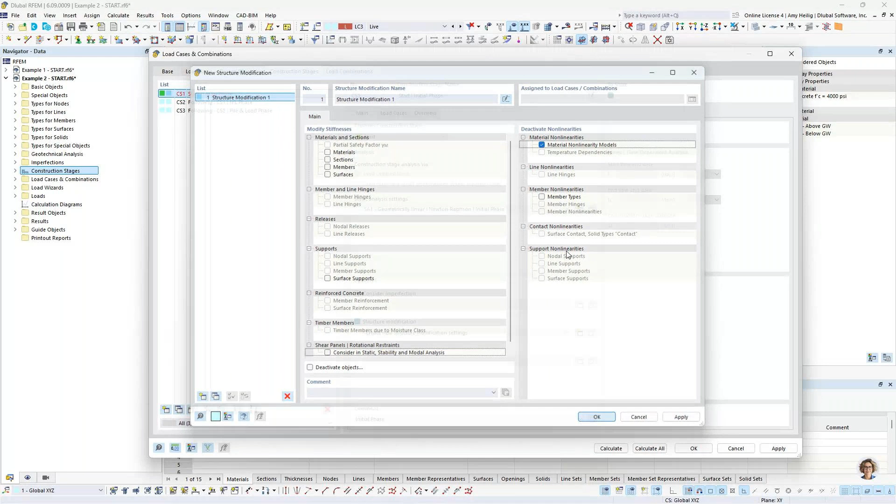With this, we can create a new definition type where we can deactivate the material nonlinearity, but only for this initial phase. So we're going to convert this soil material to a simple linear elastic material type, and we click OK. Now this is selected here again, only for construction stage number 1.

Looking at construction, one more thing to mention is our loading. We want to consider the soil self-weight only, not necessarily the live load or the self-weight from the pile quite yet. We'll do that in the last construction stage.

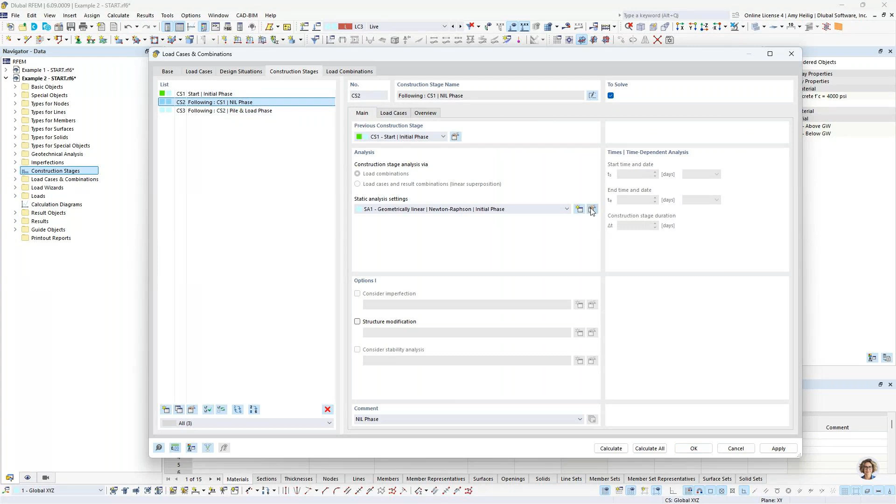So looking at construction stage number 2, we want to take a look at the static analysis settings. I've already created this. This is a geometrically linear analysis, same number of load increments, but we're going to activate that special setting we talked about, the equilibrium for undeformed structure. We're accounting for the stress and the stiffness of the soil, but not the deformation before we apply those additional loads to our pile element.

Once we have defined this, we select it in our dropdown. We are not going to activate that structure modification, because we convert this back to a highly nonlinear material. Under the load cases, we're still just accounting for the soil self-weight, so nothing further to do here.

Now we're finally ready to activate the pile member and the loading. Looking at these static analysis settings, I've created this third definition, geometrically linear, but notice that I've set this to 10 load increments. So we will slowly ramp up the loading up to 375 kips over 10 increments, and we have the ability to save the results of all of these load increments together.

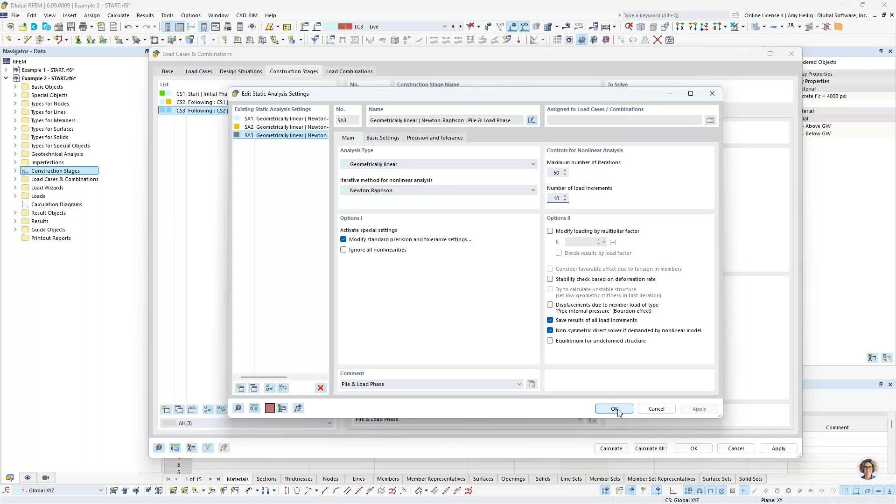Once we have this set, we make sure it is selected in our dropdown. Under the load cases is where we also want to consider the self-weight of the pile and that live load as a permanent load. So we're finally ready to run our calculation for these three construction stages.

We could click calculate all, and of course, for the sake of time, I will refer here to an already saved model with these results. So once the calculation is run, this is what we would be presented with.

We're probably most interested in this final construction stage. We've applied this 375 kips, and we have our pile activated here. Now under this fourth tab, we can view the global deformations, and perhaps we want to look at these in the vertical Z direction.

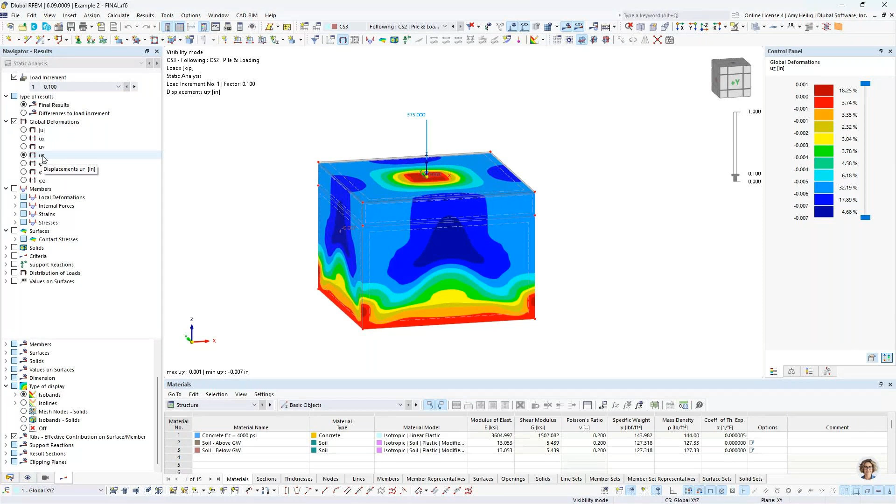If you remember, for this construction stage we have 10 different load increments and we save the results for each one of these. So what's great is that we can cycle through these different load increments as the load gets higher and higher, so that we can see how the deformations are changing within the soil solid. We could also take a look at the member internal forces as well, if we'd like, with those results.

Okay, so with the results here, I'm going to go back to the model, and we want to check out the final stage here. Again, we're still in CS3.

With the global deformations we already talked about, we can also activate here, just like what we saw with example number 1, the solid stresses through these different load increments, if we're interested in that. And then again, the member internal forces could be activated as we move through those different load increments. So a lot of similarities—we could use clipping planes and everything else that we saw in example number 1.

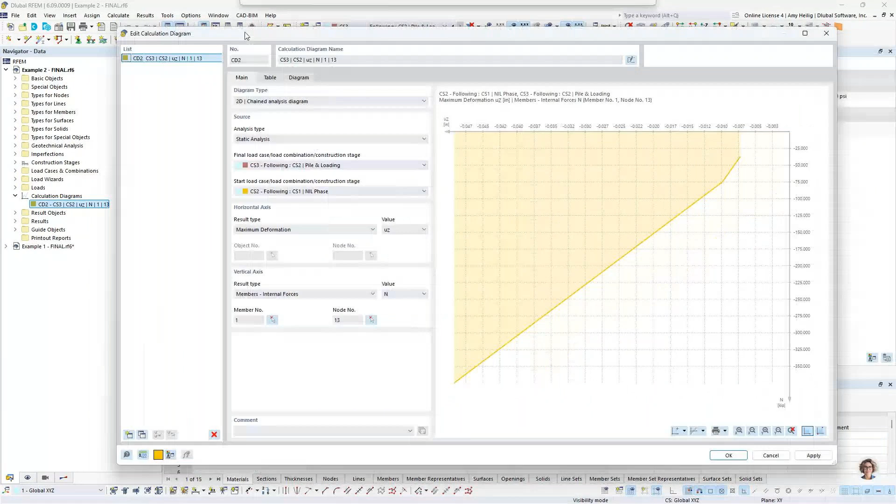The final thing I'd like to quickly show you is how to create what we call a load displacement curve. So under the project navigator, in our first tab, we have what we call these calculation diagrams, and we can create as many calculation diagrams as we want. The big benefit of this is that we don't necessarily have to export our result information to something like Microsoft Excel and create these diagrams and graphs manually—the program has this implemented in here.

So we could select from our dropdown for our new diagram a chained analysis option. The final construction stage to consider is CS3—that's going to be once we've activated both the pile and the loading. And then the start construction stage would be CS2. Within the horizontal axis dropdown options, you can see all the different options available to display, but perhaps we choose something like maximum deformation in the global Z direction.

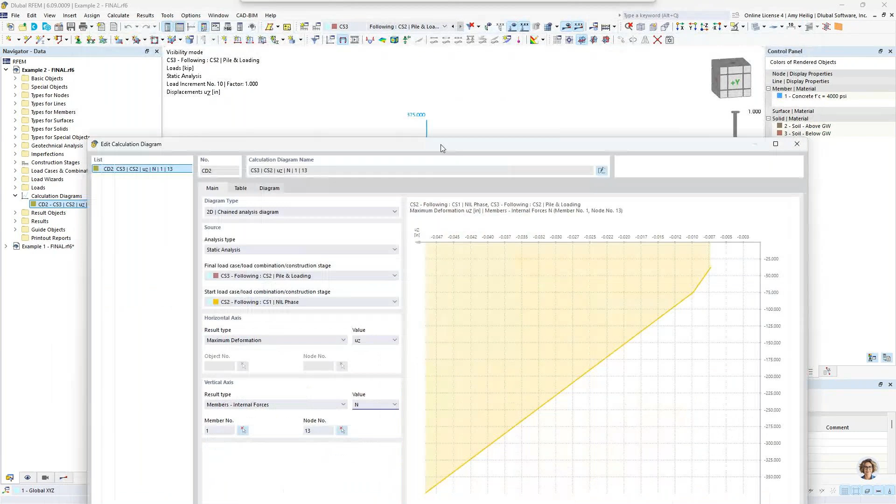In the vertical axis, we can choose something like the member internal forces, and we're probably most interested in the axial forces of this pile. We select here graphically member number 1, and then we could choose the node that we're interested in, which I would probably choose this top node here where that load is applied. This diagram is automatically generated for us, and we could add it to our printout report.

Again, we could create multiple diagrams here, and this would probably look a little bit more interesting with a more complex model. Maybe we have more construction stages where we have different loading varying through the stages themselves, but this is just a quick example to quickly show this to you.

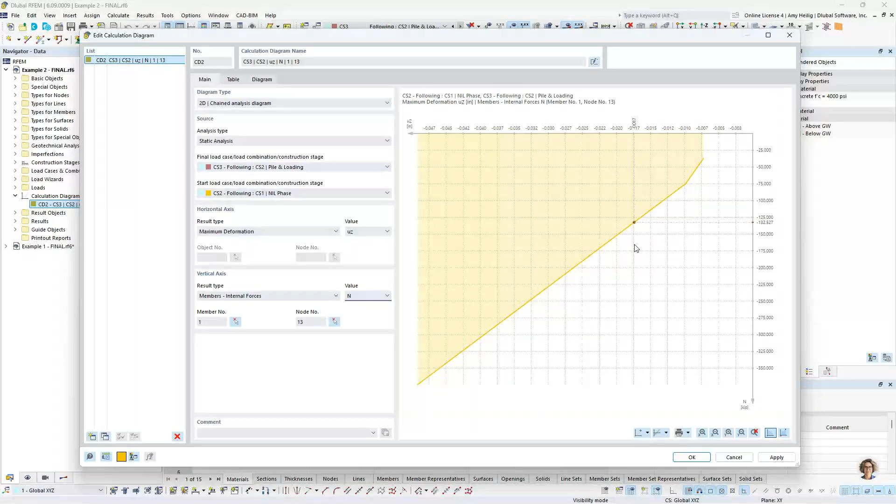Now, also keep in mind that, of course, this was a very simple example for pile design, but we could refer back to example number 1, put piles underneath this much more complex structure, this concrete building, and integrate it with the soil solid as well, with surfaces and other elements. So again, we aren't just restricted here to this single pile element, of course.

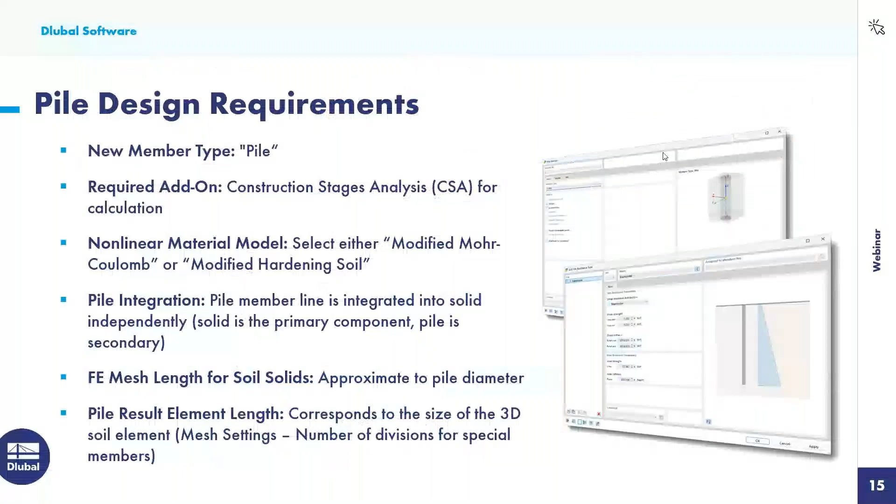Okay, so we will go back to the PowerPoint to conclude our webinar today. I did just briefly want to talk about a couple of future developments that we're working on. We certainly have a long list of development features that we're working on with the geotechnical analysis add-on, but I wanted to list a couple that are currently in work and should be available within the near future.

The first is additional soil material models. We are also working on the Cam Clay model, which will be a soil material type used to represent clay soils, including this clay soil behavior under different loading conditions. We're also working on the jointed rock model, which will be used to represent rock materials with jointed or fractured characteristics. So you can keep an eye out for that in a future release with this add-on.

The other really cool thing that we're working on is the 2D constrained modulus method. What we want to do here is automatically determine the surface support condition—the elastic spring coefficients—directly from the soil properties that you input into the program. We'll calculate this according to a nonlinear iterative method.

And remember, I talked about the PowerPoint way back when of this simplified approach versus the 3D solid. Well, this refers to the simplified approach with just placing spring elements underneath the surfaces, but we're going to calculate these spring coefficients automatically for you directly from the different soil properties. So this is certainly a more simplified method compared to what we saw today with that 3D soil solid, but could be a big advantage in some scenarios for your models if you wanted to take that more simplified approach.